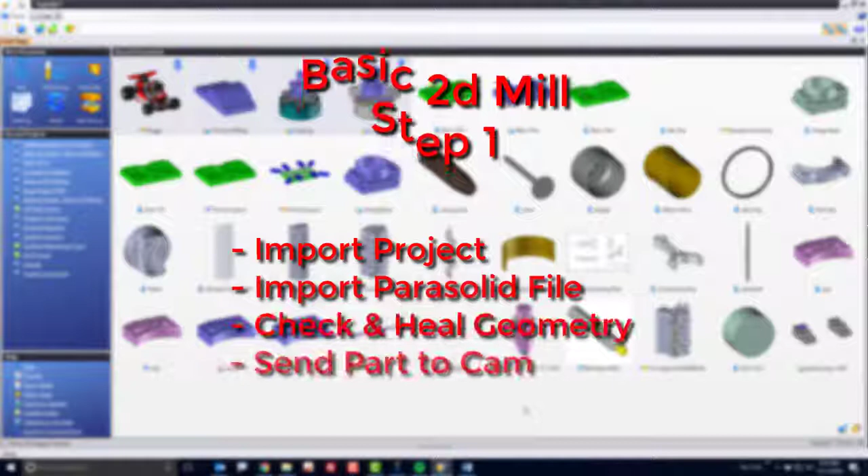The first thing that you're going to want to do to use the basic 2D mill tutorial is import the project. To do this, go up to your Home tab and then over to the Import Project command. Once you do this, you're going to browse to the folder where you downloaded the TopSolid package to, in this case the one called Getting Started Basic 2D Milling. Select it and click Open.

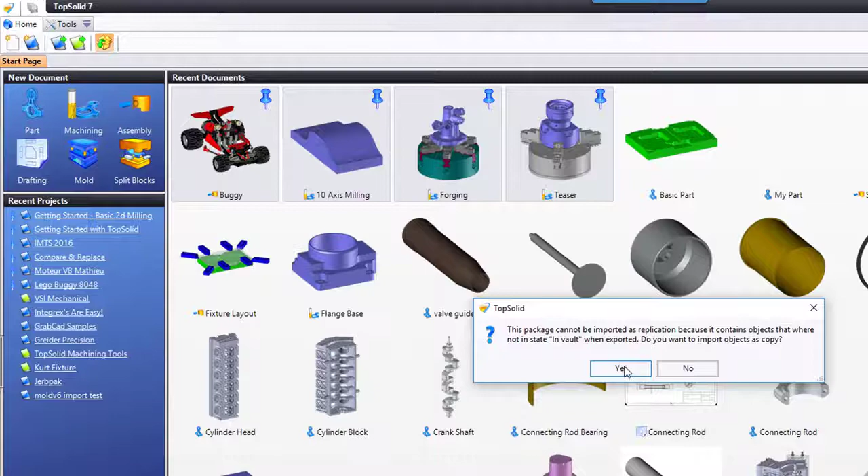Now on your screen this window may appear, but it only will appear if you have imported this package before. I'm going to go ahead and click Yes to this. Finally, I'm going to hit the green check mark and TopSolid is going to import the package. Now this package contains the sample data needed for this simple 2D milling tutorial.

As you can see, there's a couple of folders here already. There's a videos folder, a customer data folder, and a machining folder. Inside the customer data folder is the TopSolid file that we're going to import in order to do the machining. You'll also have all the videos, once I'm done recording them, in this folder.

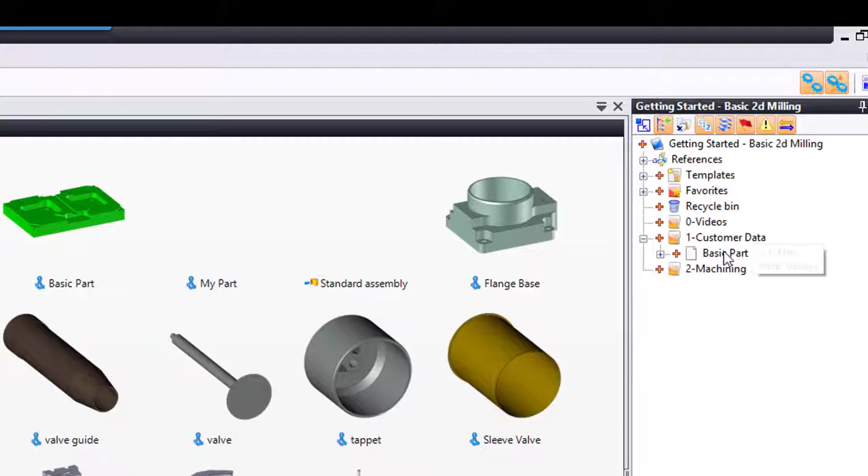So to import the file, I'm going to select the basic part, right mouse button click, and choose Convert Document. Here I'm just going to accept all the defaults in TopSolid. Like that, TopSolid imports the model.

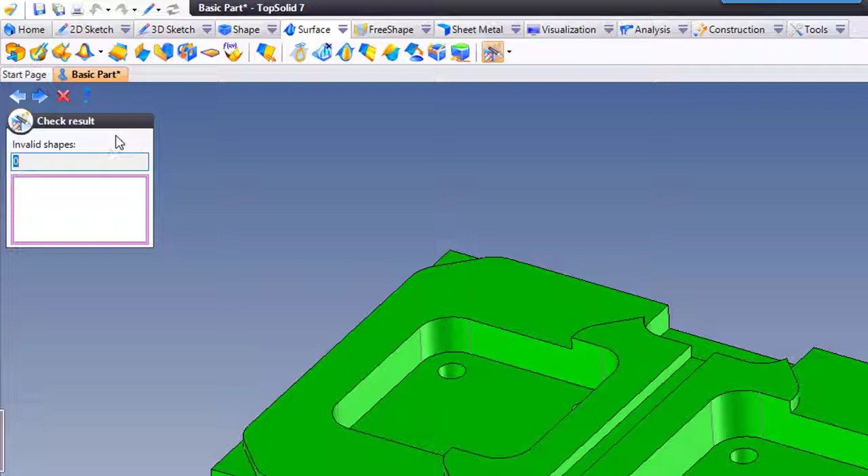Before you do any work on any part that's imported from another system, you want to make sure that the part is good. So I'm going to go to the Surface tab, and then I'm going to go to the Heal command right here. I'm going to go ahead and select my part and hit the blue arrow to take the next step. Here TopSolid ran a Check Geometry command on it. What that's doing is checking to make sure all the geometry is valid. I'm going to go ahead and hit Next.

Now TopSolid wants to run the simplification process. Simplification measures every single face on the model and every edge, and if they measure as simple forms of geometry such as planes, cylinders, lines, arcs, and so on, we convert those entities back to simple forms of geometry. Finally, I'm going to hit Next one more time. It's going to run one more check to make sure the act of simplifying didn't do any damage to the part. Invalid shapes is 0. We're good to go. Last step here, I'm going to go ahead and hit Save.

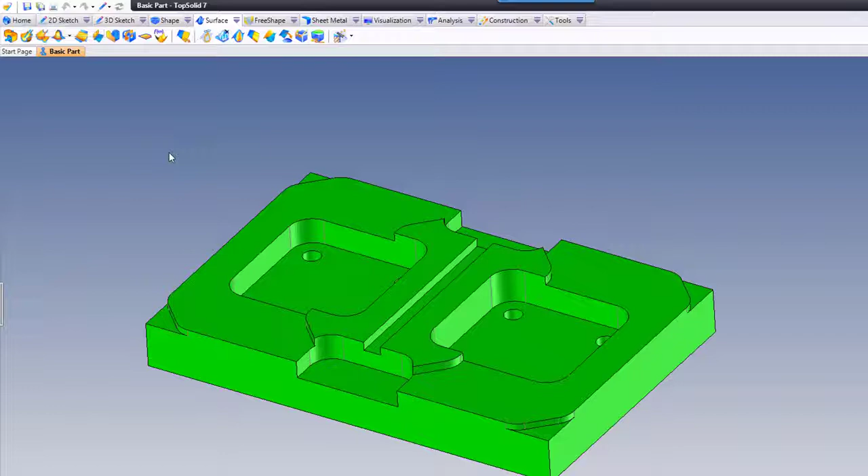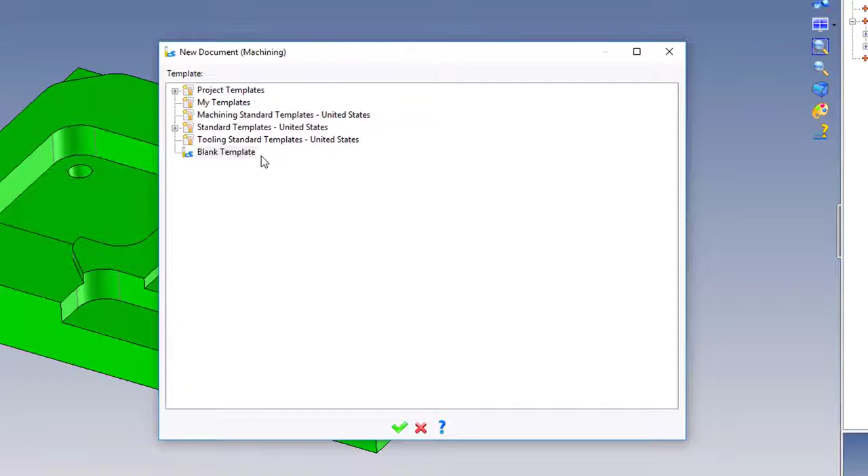Next, I want to send this into machining. So to do that, I have one of two ways. I can either go to the tab right here that says Basic Part, right mouse button click, and choose Machining, or I can go to my project tree over here where my imported part is, right mouse button click, and choose Machining there. Both get to the same final condition. Once I send it to machining, it's going to ask me if I want to use a template. In this basic sample, we're going to say no and just hit the green check mark.

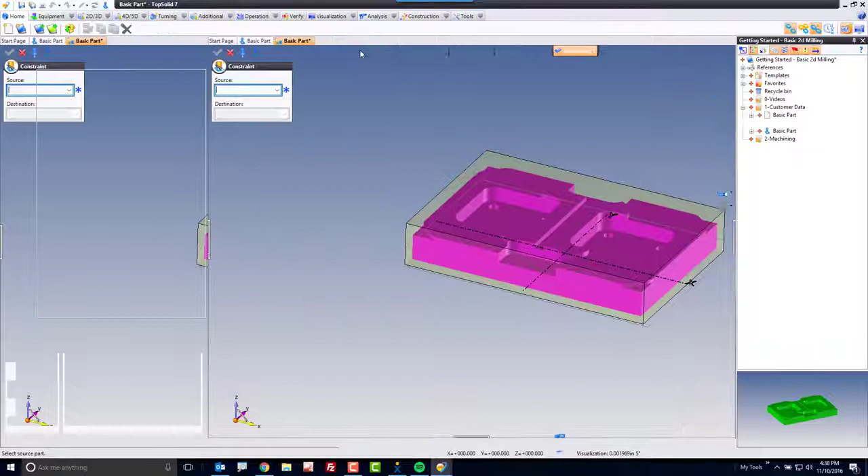Next, TopSolid wants to know what kind of stock we want. We're going to use simple block stock, hit the green check mark. And now TopSolid has created the stock block and imported the two objects into CAM. Finally, it wants to know how we want to position this part. Well, I'm going to go ahead and just click Positioning 1 here because we don't need to do any special positioning. This part was designed and oriented the way we need to machine it, so we're good to go.

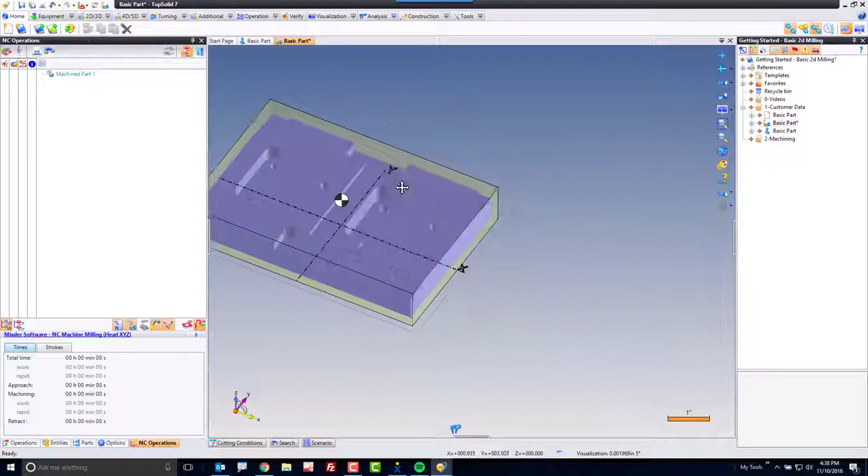The last thing I'll point out here is a couple of basic commands. First of all, if I middle click, and that's using my scroll wheel of my mouse, I'm holding it down, that's rotation. If I middle click on top of a part, you see that little blue point? That's a temporary rotation point. If I hold my right mouse button down, that's pan, and if I scroll the wheel away from me or scroll it towards me, that's zoom in and zoom out.